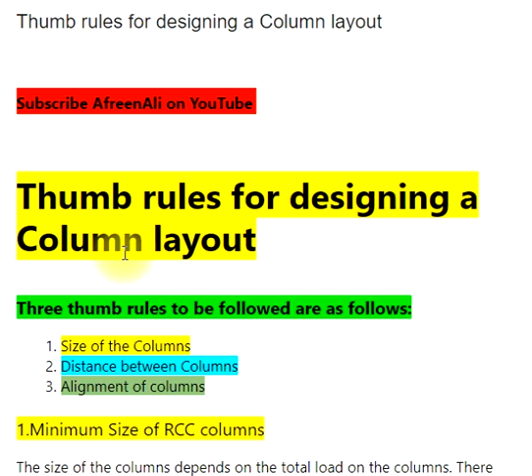Thumb rules for designing a column layout. 3 thumb rules to be followed are as follows: size of the columns, distance between columns, alignment of columns. 1. Minimum size of RCC columns.

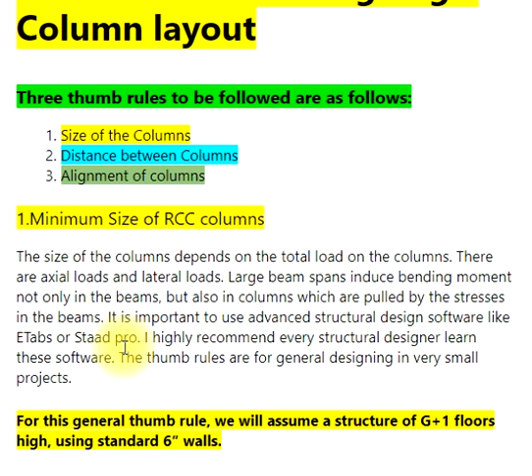The size of the columns depends on the total load on the columns. There are axial loads and lateral loads. Large beam spans induce bending moment, not only in the beams, but also in columns which are pulled by the stresses in the beams. It is important to use advanced structural design software like ETabs or Staad Pro. I highly recommend every structural designer learn these software.

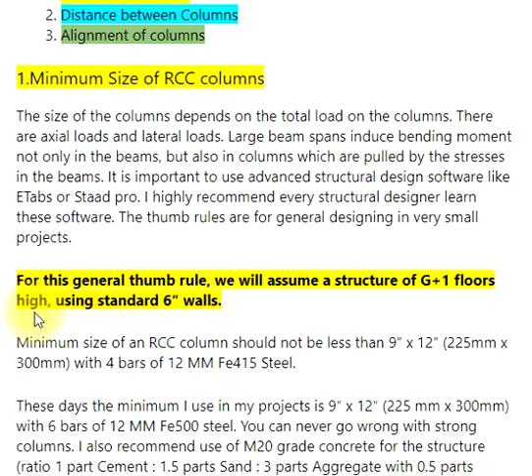The thumb rules are for general designing in very small projects. For this general thumb rule, we will assume a structure of G+1 floors high, using standard 6 inches walls. Minimum size of an RCC column should not be less than 9 inches by 12 inches, 225 mm by 300 mm, with 4 bars of 12 mm Fe415 steel.

These days the minimum I use in my projects is 9 inches by 12 inches, 225 mm by 300 mm, with 6 bars of 12 mm Fe500 steel. You can never go wrong with strong columns. I also recommend use of M20 grade concrete for the structure. Ratio 1 part cement, 1.5 parts sand, 3 parts aggregate with 0.5 parts water by volume.

I recommend use of 8 mm stirrups at a distance of 150 mm center to center throughout the length of column. This setup of 9 inches by 12 inches RCC columns is safe for G+1 floors. There are a lot of other considerations, but this is just a thumb rule.

2. Span. Distance between 2 columns. For the above column setup, a span of up to 5 meters is quite safe. One can use beams of size 9 inches by 12 inches, 225 mm x 300 mm, with a slab thickness of 5 inches, 125 mm, cast in M20 concrete for spans up to 5 meters.

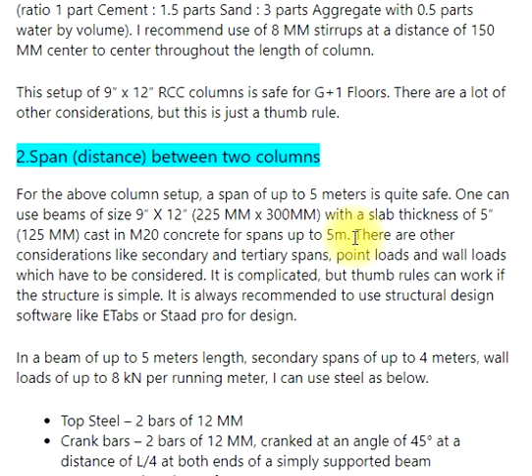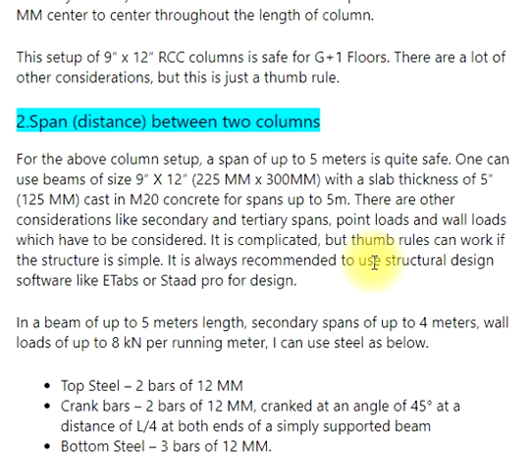There are other considerations like secondary and tertiary spans, point loads and wall loads which have to be considered. It is complicated, but thumb rules can work if the structure is simple. It is always recommended to use structural design software like ETabs or Staad Pro for design.

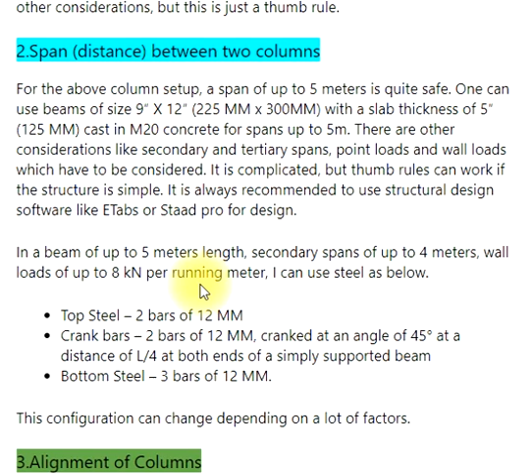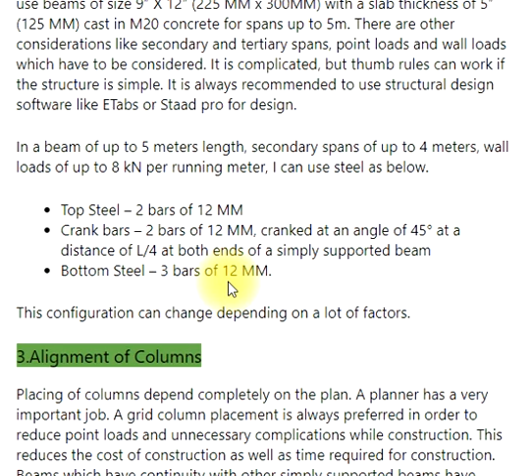In a beam of up to 5 meters length, secondary spans of up to 4 meters, wall loads of up to 8 kilonewtons per running meter, I can use steel as below. Top steel 2 bars of 12 mm, crank bars 2 bars of 12 mm, cranked at an angle of 45 degrees at a distance of L/4 at both ends of a simply supported beam. Bottom steel 3 bars of 12 mm. This configuration can change depending on a lot of factors.

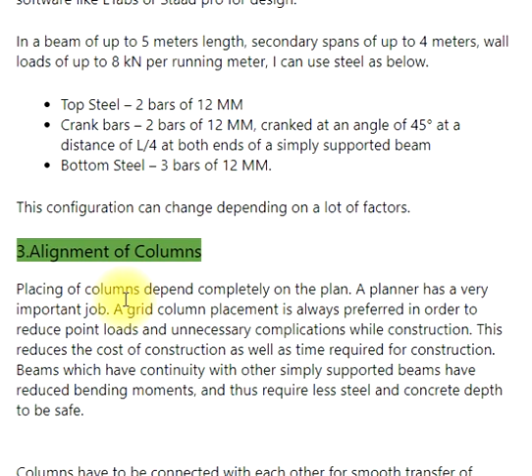3. Alignment of columns. Placing of columns depends completely on the plan. A planner has a very important job. A grid column placement is always preferred in order to reduce point loads and unnecessary complications while construction. This reduces the cost of construction as well as time required for construction.

Beams which have continuity with other simply supported beams have reduced bending moments, and thus require less steel and concrete depth to be safe. Columns have to be connected with each other for smooth transfer of loads. An experienced planner will keep such things in mind when planning the structure.